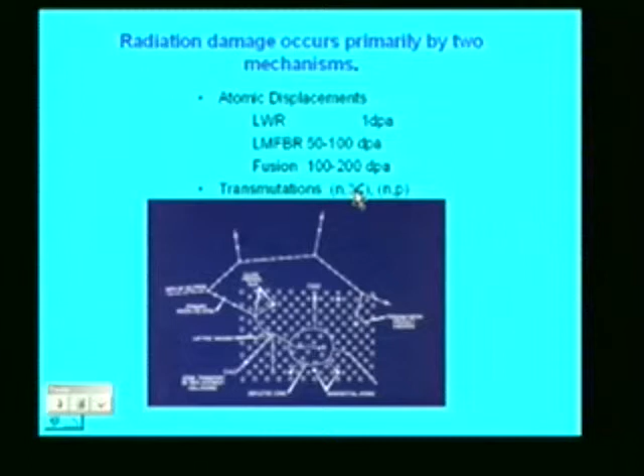In fusion, we may have 100 to 200. Well, we don't have any fusion neutrons or fusion reactors yet, so these are design goals. One time it was 400 dPa. I think people have backed off a little bit. The transmutations, this is supposed to be an alpha. We have n-alpha reactions that result in helium, and n-p reactions introducing hydrogen.

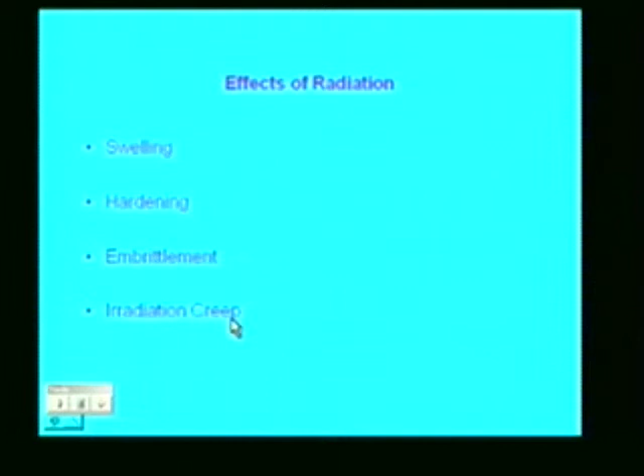So some of the effects of radiation, the most important ones, are swelling, hardening and embrittlement, which go together, and a rather interesting phenomenon, radiation creep. And I'm going to illustrate each of these. Swelling is a phenomenon where the vacancies we talk about precipitate and form voids. So they behave just like another chemical species, and a supersaturation of vacancies can lead to stable configurations of them, and they can grow as voids.

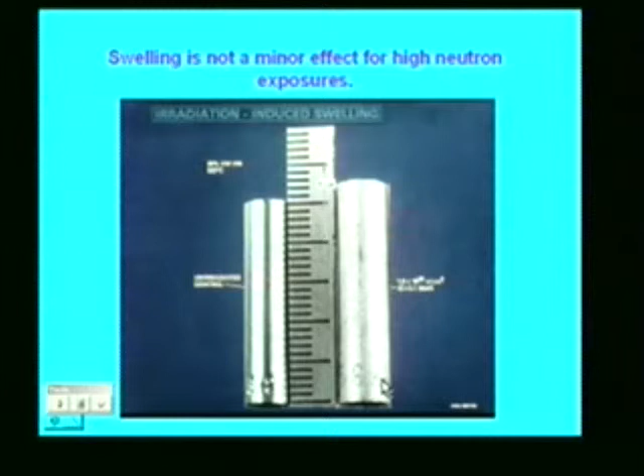Well, I've also heard people, especially in the fusion community, say that if you could hold swelling below 1% or to 1%, everything would be fine. But let me illustrate that, because I have two rods. One is 0.3% longer than the other, which would correspond to a 1% volume swelling. And if I match the ends of these rods, this is how much it bows. So if we have even 1% swelling, for example, in fuel rods, there could be serious problems. Fortunately, there's another mechanism, radiation creep, that will sometimes help us by relieving swelling stresses.

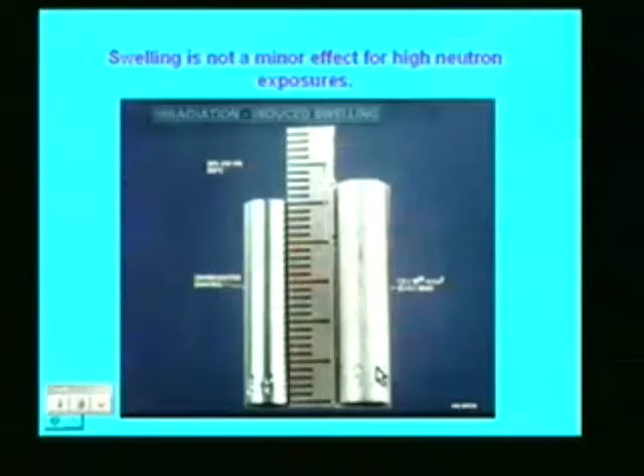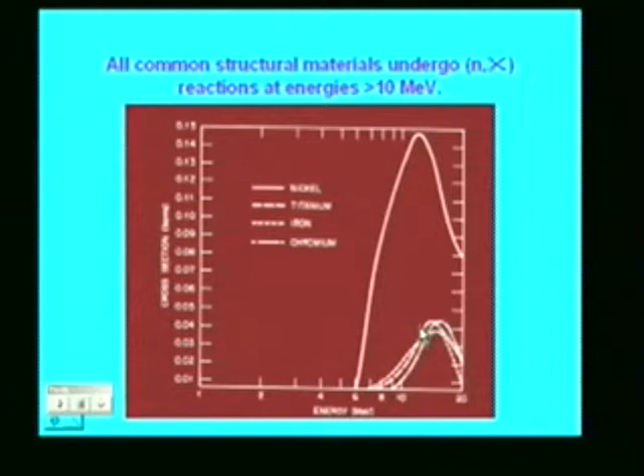Well, we talked about transmutations, and particularly n-alpha reactions in fusion reactors. And one way, you might say, to get around this problem is just to be very clever about choice of materials. But what I'm illustrating here is that if we look at the n-alpha cross-section for common structural materials, we find above about 10 MeV, they all have significant n-alpha cross-sections. Now you might say, well, let's stay away from nickel, that's a particularly bad one. But here, iron, chromium, titanium, and I could fill up that graph with a lot of other materials.

But worse than that, I think it's safe to say that all reactors have some sources of helium. One is the boron-10 reaction, and here, as you're probably familiar, boron-10 absorbs a thermal neutron and produces helium and lithium-7.

And this can be important in LWRs, for example. We have stainless steel core components. Stainless steels typically have boron concentrations of 10 to 30 ppm. And 1 weight percent boron will ultimately burn to 1 atomic percent helium. So we'll talk about that a little bit later, but small concentrations of boron can lead to trouble.

The next reaction is more interesting because it's a two-step reaction. Nickel 58 is a common isotope of nickel. It's about 68% abundance. It absorbs a thermal neutron to form nickel 59. The other product is a gamma. Nickel 59 also has a significant thermal neutron absorption cross-section, and it leads to iron 56, the common stable isotope of iron, and an alpha particle. So this can be a very significant source of helium in nickel in a thermal reactor.

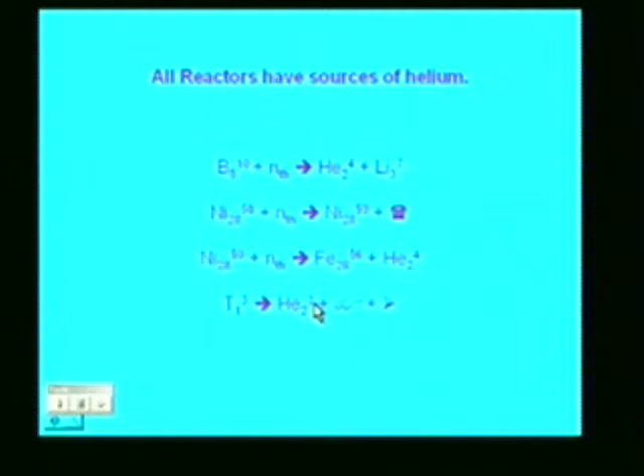Another source is just decay of tritium. Tritium decays by beta. It's a beta and an antineutrino. But the important point is the recoiling nucleus is helium-3. And this leads to severe problems, actually, in some of the tritium production reactors at Savannah River. And the reaction can also be exploited as a method of generating helium to study helium effects in materials.

And this material is Inconel 600. It's a high-temperature nickel alloy. Used to be a popular steam generator material, though there you don't have a neutron flux to worry about. It has been irradiated in the high-flux isotope reactor at Oak Ridge, producing about 1,800 ppm helium through the two-step nickel reaction at 650C. And this is probably one of the worst cases of helium embrittlement I've seen. You can continue irradiation and probably make it fall apart on the grain boundaries and produce metallic sand, if you like.

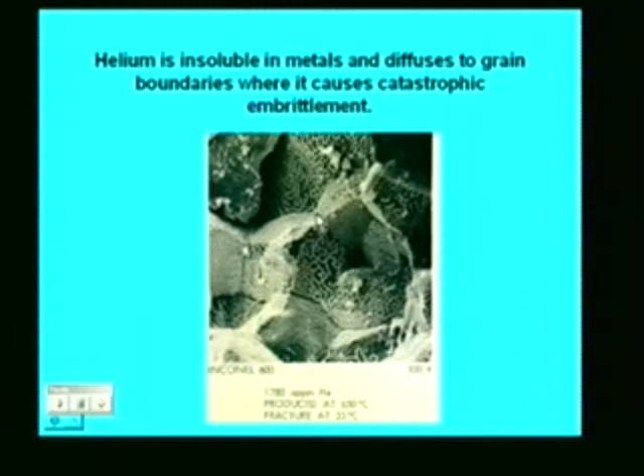What magnification is that? What application? Magnification, when you look at grain boundaries, what? Oh, the magnification? Yeah. I didn't read it, but 200 is pretty common, 200, 500.

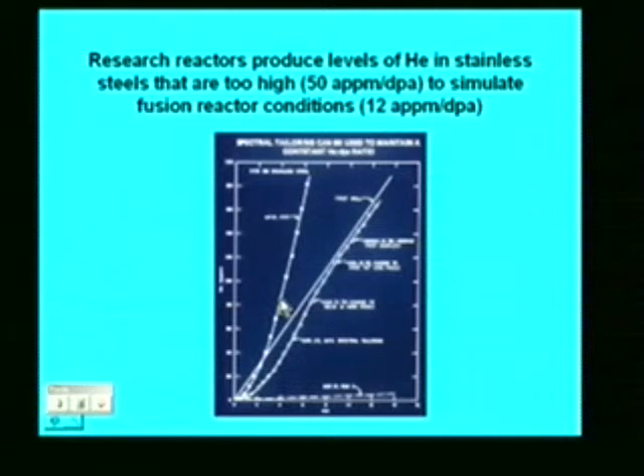There's another technique. If we have some alloys with low nickel contents, we can increase the nickel by nickel doping to produce the correct helium to dpa level. And here we're looking at an alloy. I hope you can read it better than I can. It's a common alloy of 12 chrome 1 moly with 0.2% nickel. If we irradiate that, we get far below the desired cross-hatched region, but if we can increase the nickel to 2%, we can produce the desired amount of helium.

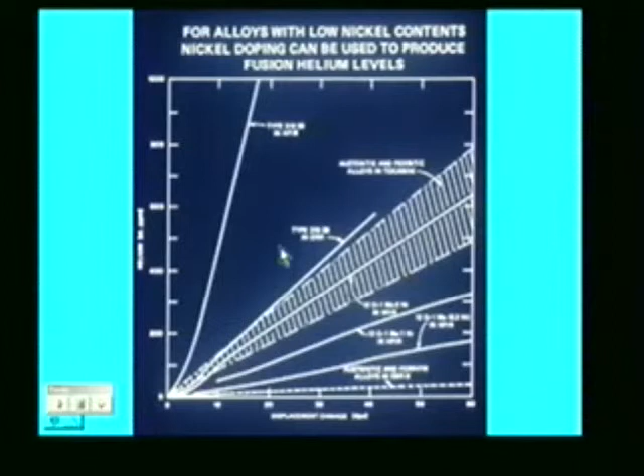Can also inject materials with helium from a cyclotron and then follow them with neutron irradiation. Now here's a case of vanadium alloy where we don't have any nickel. We can't use that neutron two-step reaction. So these have been cyclotron implanted. And if we look on this plot of elongation as a function of temperature, we see that the control has ductility increasing with temperature, which we'd expect, but if it has helium in it, we're down here with a very significant drop in ductility.

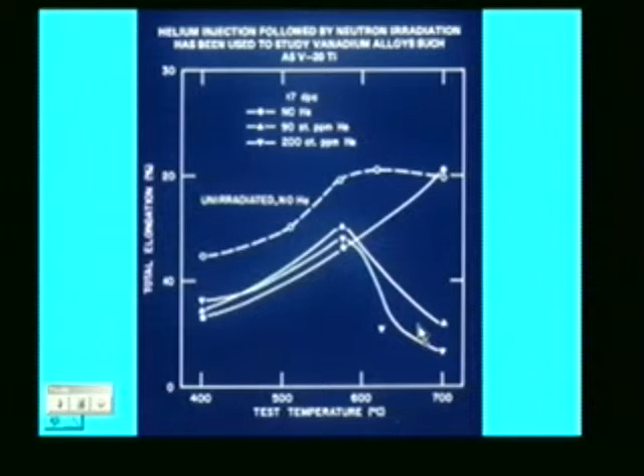So we're showing several techniques, and the reason is that when you're doing simulations and studying the fundamental behavior, one technique will not do it. You need every piece to the puzzle that you can get. So we use various techniques. For example, if you're going to dope with nickel, you have to understand the effect of adding the additional nickel. So one experiment cannot simulate behavior.

Another problem is that neutron radiation usually, in fact most always, produces intensely radioactive materials, which then necessitates remote handling. So when we generated these data, all of these tests are done behind 3 to 5 feet of high-density concrete and maybe 3 feet of lead glass, or a tank filled with, in this case, zinc bromide solution. Then all the materials are handled remotely with manipulators. In this case, we have an ultra-high vacuum chamber that's operated entirely remotely.

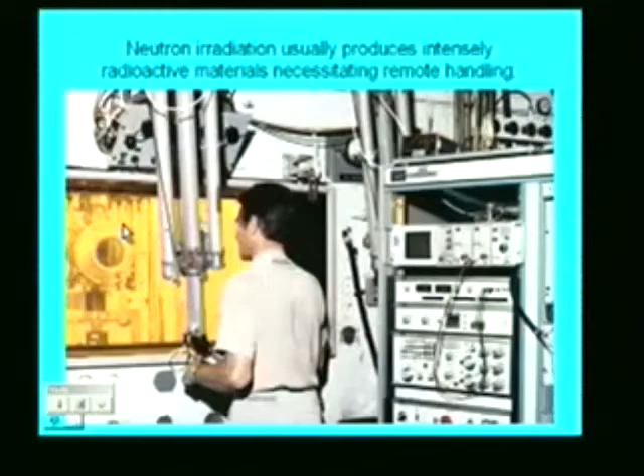Okay, I think that's the next slide.

Okay, I said we'd talk about radiation creep. Well, let me first talk about creep. If we take a wire and hang a weight on it, we'll get elastic deformation, and then it will stop deforming. If we increase the temperature, then it will start to deform again. That weight will fall. And this is a phenomenon of creep. But now, if we go back to our low temperature wire, room temperature, hang a weight on it, it sits there, now put it in a radiation field, it will deform. So for radiation creep, we need two things. We need a stress and we need a radiation field.

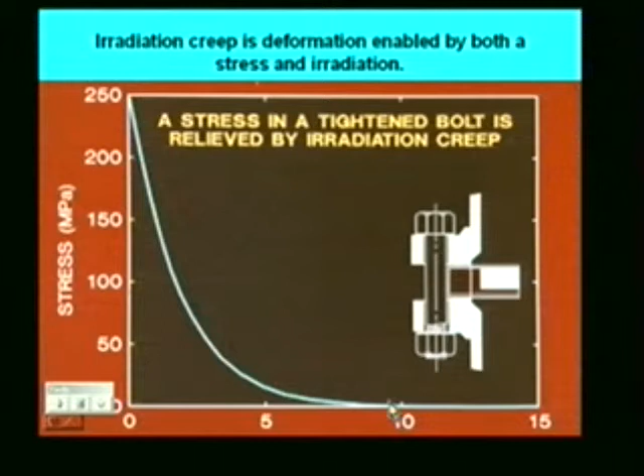To put it in perspective, if we tighten a bolt, in this case we're preloading it to a stress of 250 MPa, it's a pretty tight bolt, and irradiate it, by the time we get to 10 dpa, 10 displacements per atom, we've completely relieved the stress in that bolt. So one thing it's telling us, if you're going to fasten materials in a high flux region, don't bolt it. The other thing it's saying is this is a phenomenon that can sometimes be useful, because if we have stresses resulting from swelling, or in some cases thermal stress, radiation creep can be beneficial and relieve these stresses.

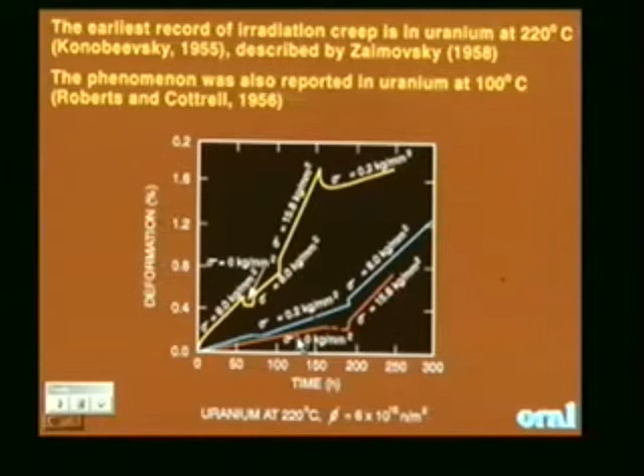But the earliest record of radiation creep is in uranium, and this was described at the first and second Atoms for Peace conferences in Geneva from some Russian work. And notice here we have a stress applied. When the stress is removed, the material stops deforming, or if we shut down the reactor, the material stops deforming. So we need, again, the two things. We need the radiation and we need the stress field.

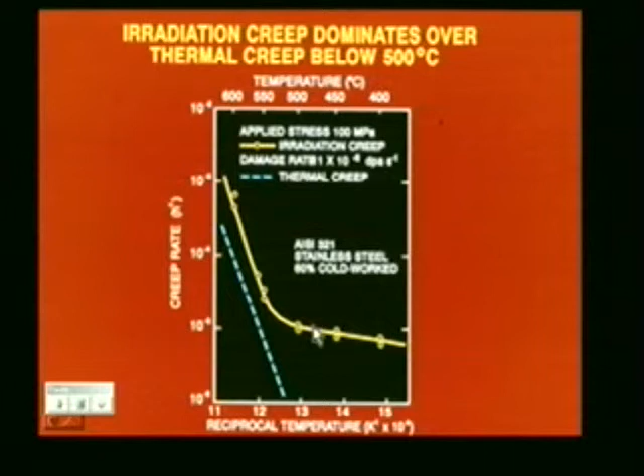Now, I said it was not a high temperature phenomenon, and here we have creep in stainless steel as a function of temperature, and in thermal creep we have deformation, but when we get down below, in this case, 500 degrees, it becomes insignificant. And we know that if we keep metals around at room temperature, they don't deform. The Eiffel Tower has been standing since 1889. It doesn't bend over and collapse. But if it's in an irradiation field, we see that even at the low temperatures, we have a significant creep rate that remains. And it has a very weak temperature dependence, maybe even none at all. That's quite an interesting phenomenon.

Well, how do we study it? Well, Galileo had all the right ideas. He was a clever fellow. And we said we could just hang a weight on a wire. Well, he used a beam and then hung a weight on the beam to measure deformation. Things haven't changed too much. The principles are the same.

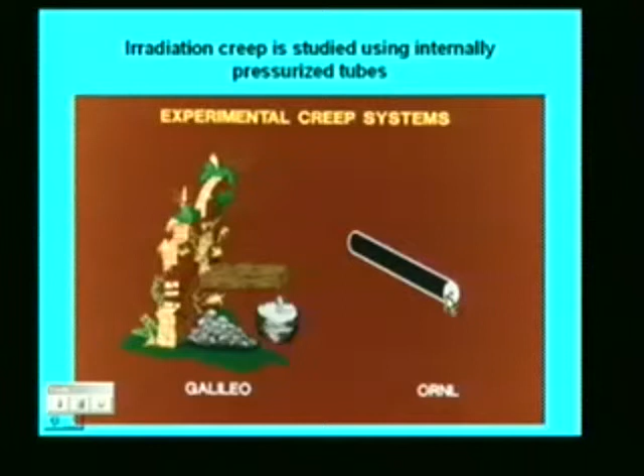We often use a pressurized tube. So we have a tube and we put it in a pressure bomb, pressurize it with helium to a desired level, and then shine a laser through a sapphire window and seal the tube. So this is a common way because they take very little space. We can put them in a reactor and we can study quite a variety of stresses. So it's a very convenient way to study radiation creep.

Well, now let's talk about some other defects. We talked about point defects in metals, talked about interstitials and vacancies. There's another kind of defect. We can take a plane of atoms, it's called a partial plane, and sandwich it into a crystal. And if we do that, notice it's a partial plane, it doesn't come all the way down. If we do that, we'll have a linear defect along the line where that plane ends. And this is called a dislocation.

And if we want to shear that metal, if we didn't have a dislocation there, if we want to put a stress on this plane with respect to the one above it, we'd find we had to break all these bonds. But if we had a dislocation, we can break one bond at a time, and the dislocation will kind of flip over and move to the edge. And metals commonly plastically deform.

Now, if we were to have a vacancy go into the edge of that row of atoms, then effectively that row of atoms would move up one lattice constant. Or if an interstitial diffused into that site, that row would move down. So we can have dislocations, we use the term climb, up and down, by diffusing interstitials and vacancies. So they can move. And if the dislocation is tied to a defect by an elastic stress, then these defects can cause it to move around these objects and enhance plastic deformation.

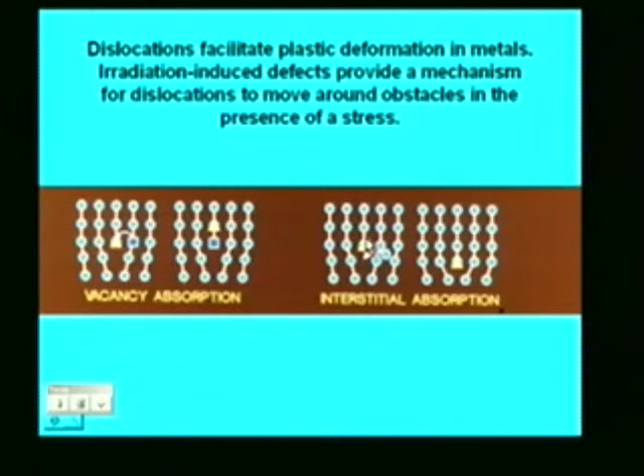All right. Well, we have lots of vacancies and interstitials around. Vacancies cause it to move up, and interstitials cause it to move down. So we have both. On the average, we don't go anywhere. But if we introduce a stress, then we can change things. Because if we had a tensile stress there to pull atoms apart in that region, it would be more energetically favorable to have an interstitial there. So now we can have interstitials predominate over vacancies, and now that dislocation can move. And this is one of the mechanisms of irradiation creep.

And the point is, if it can move around obstacles, get around obstacles, then we can have glide again. So the irradiation hardening that we said resulted from putting a lot of defects in and tying up these dislocations. We only said half of that earlier, but that's what happens. Now we can get them to move around.

So we kind of mislead people even when we call it creep, because it's not a high temperature phenomenon, it's an irradiation phenomenon. And what's happening here at these low temperatures, interstitials are free to diffuse throughout the lattice and can be attracted to the dislocations. But the vacancies are frozen out. Temperature is too low for them to diffuse. So instead of having them balance, we have a preponderance of the interstitials, and that's causing a higher creep rate at the lower temperature. And we can even get radiation creep at liquid nitrogen temperature.

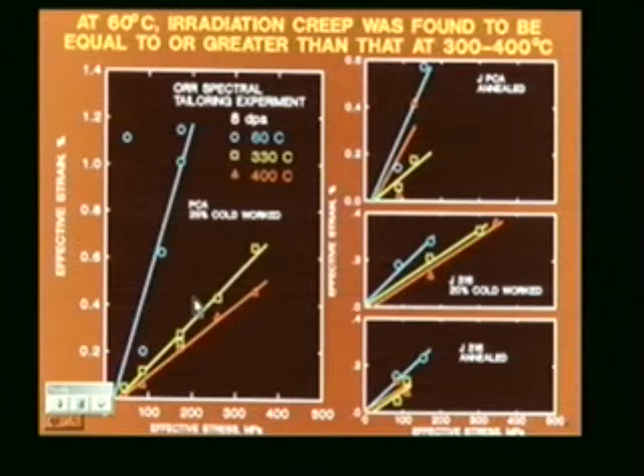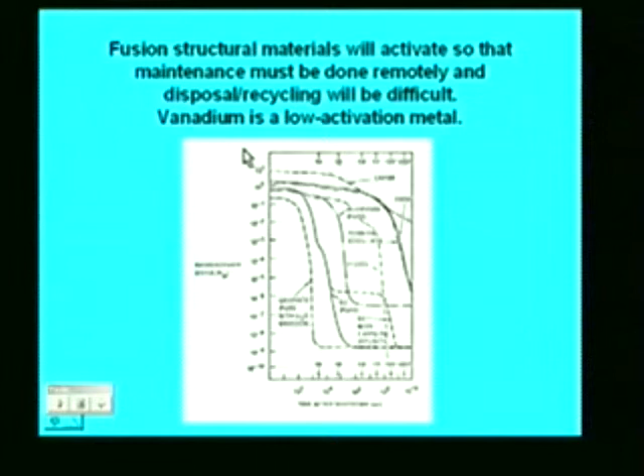So, if you have a structure like a fusion reactor made from vanadium, then at the end of its useful life, you have a chance of recycling it, or at least if you have to, burying it. Recycling is favored. The structural materials in a fusion reactor will activate to the point where maintenance on the machine has to be done remotely. And the disposal and recycling, of course, will be difficult. So vanadium is looked at as a low activation material. Especially true in Europe, where they're more sensitive to disposal of radioactive materials. So we're looking at vanadium as a fusion reactor material.

And the vanadium system would be cooled by lithium. Two reasons. One is that lithium can be used to generate tritium to fuel the reactor. The other is that lithium is compatible with vanadium as a coolant. Water or gas would not be, because you can't, for example, get helium pure enough to not embrittle the vanadium. In the case of lithium, the primary contaminant is oxygen, and the oxygen will primarily go into the lithium rather than the vanadium. So it's a nice material for vanadium.

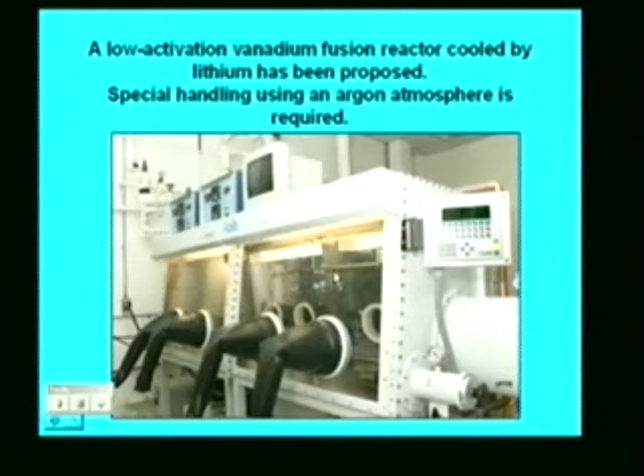But if you're going to use lithium, special handling is required, particularly a very high purity argon atmosphere. So the work with lithium is done in a high purity argon glove box. And in this glove box, we keep oxygen, moisture, and nitrogen below 1 ppm.

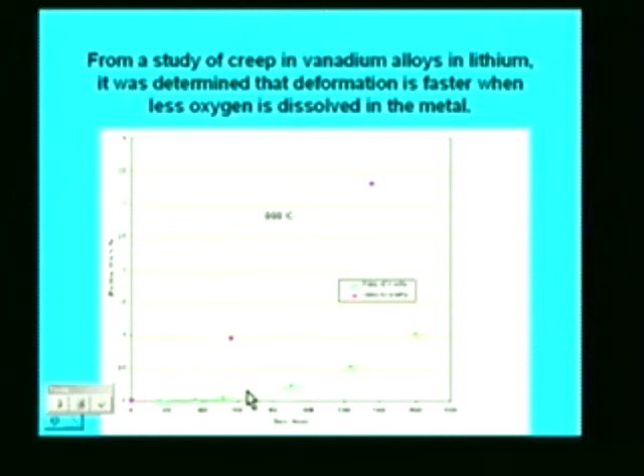Well, from the study, we said that in the case of lithium in contact with the vanadium, oxygen will preferentially accumulate in the lithium. So here we have creep strain, done with pressurized tubes again, in the case of vanadium in lithium, and the green curve is vanadium in a vacuum. And you can see that the creep rate is much higher in the case where we don't have impurity atoms impeding the dislocation motion. So it's a softer material when we remove the oxygen, and we get a higher creep rate. And needless to say, if you're going to use this as a structural material, you better know what the creep rate is.

Well, transmutation helium is also important in fission reactors. Repair welds are difficult or even impossible with helium concentrations as low as 1 to 10 atomic ppm. And here is an example. We have stainless steel with just 5 ppm helium. We've attempted to make a repair weld, and you can see it doesn't look great. And here we had it cracked.

They have a fracture surface that looks very crystalline. What do we call the fracture surface? What kind of fracture? Intergranular. Broke on the grain boundaries. Now if we go to a higher magnification, in this case we're really going up, this is 2000, we usually don't need it that high, we notice something very strange about the grain facets. They're all full of bubbles. When you look at it with higher mag, indeed, they are just coated with bubbles. And the bubbles link up, the material falls apart.

So if you wanted to make a repair weld, let's say at the upper shroud in a BWR, here's a case where it's at a very high flux, you probably couldn't do it. Again, just because of the boron, you have 10 ppm boron, leads to 10 atomic ppm helium, and with normal techniques you can't weld it. So this is one thing that's being investigated, how we might apply a compressive stress, for example. Works fine in a laboratory. I don't know how it would work in a reactor vessel. Meaning I don't know how to do it in a reactor vessel.

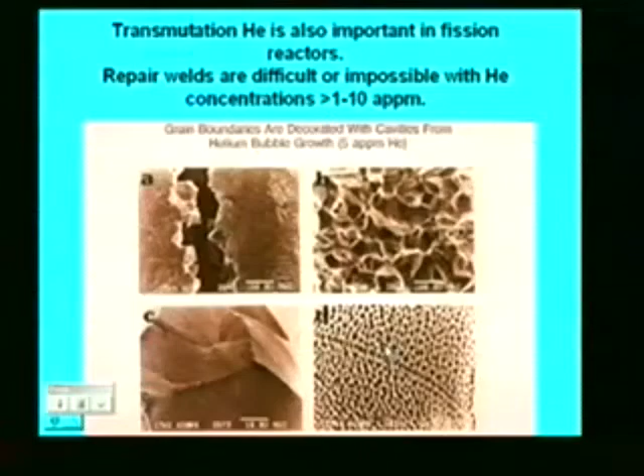Okay. Let me touch a little bit on another problem with transmutation. Let me first talk about burnable poisons. Burnable poisons are used in all modern reactors to homogenize the power distribution and reduce the extent of the control system required. And what I'm showing here is, if we look down the core region of an LWR, of a PWR here,

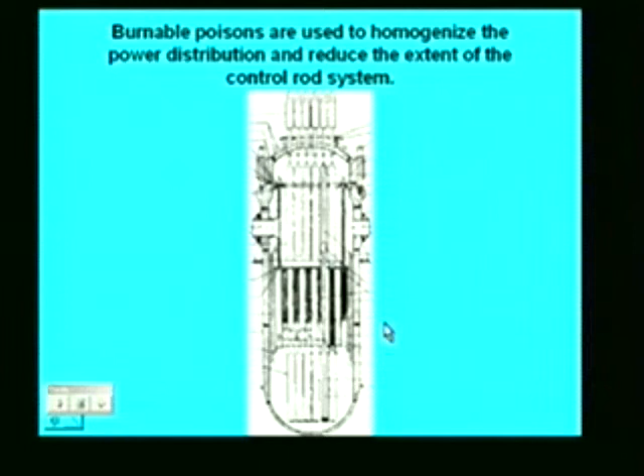if we load a critical mass of uranium, we can start a reactor. And as soon as we fission the first uranium atom, we no longer have a critical mass, so our reactor shuts down. So obviously you have to load enough uranium for the length of your fuel cycle. Well, now if you do this, you have to get back to criticality, so you have to put control rods in there. If you really have a high fuel loading and then you put in all your control rods, having to just pull them a small distance to get critical, you end up with almost all your power produced in the bottom of the core. Of course, designers can get clever about this, and they have banks of control rods, so you don't just have one bank, and that helps.

But if you had a burnable poison, homogeneously distributed, and ideally one that burned at the same rate as the fuel, you wouldn't need a large control system, and then you pull the rods out and generate power throughout the core, and even out the power. So burnable poisons have a large benefit, and as a result, they're used.

Boron is frequently used as a burnable poison, often inside the fuel pins. We've seen this reaction before, the boron-10 reaction, and remember it's producing helium. Well, helium gas generates an internal pressure in the fuel pins, and when the internal pressure exceeds the coolant pressure, you're going to have the cladding separate from the fuel, and then the centerline temperatures of the fuel are going to soar. So we don't allow that to happen. So using boron as a burnable poison can be limiting your fuel burnup.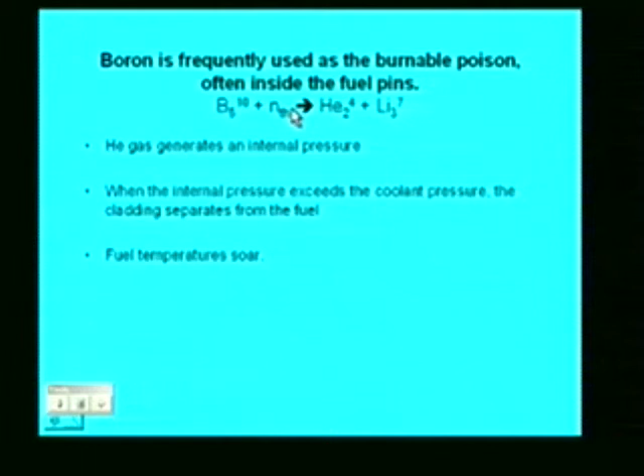Well, other burnable poisons can be used, and they are used, but they do not burn completely. So you end up with residual reactivity at the end of your fuel cycle, and that's going to shorten the life of your fuel. It's like having a control rod stuck in there. You could run the fuel longer if you didn't have that burnable poison in there.

The residual reactivity usually results from lower sigma A isotopes, lower absorption cross-section isotopes that burn more slowly than the primary absorber. Now, if the cross-section were small enough, they wouldn't cause any problem. It's the intermediate ones that cause problems.

For example, here are the stable gadolinium isotopes, and gadolinium-157 probably has the largest absorption cross-section of any isotope. It's absolutely enormous. Gadolinium-155 is also huge, but 154 is around 60, and that one is a problem because it is an absorber, it is significant, and it doesn't burn up very fast. So by the end of the fuel cycle, it's still there. Gadolinium-156, I believe, has an epithermal cross-section that makes it a problem.

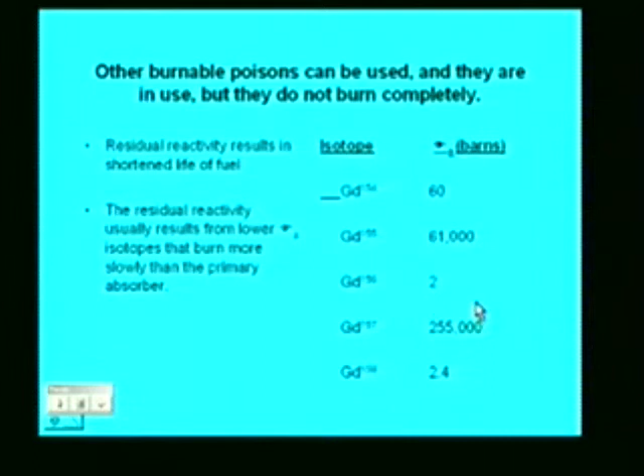Well, we could remedy that by isotope separation. An example here is again gadolinium. Over here we plotted the macroscopic absorption cross-section as a function of time. If we look at the total, we notice after about 3 or 4 years, we end up with the residuals in a steady state around 0.15 or so. In this case, we have removed the gadolinium-154 and 156, and you can see that the residual is lower by roughly a factor of 5.

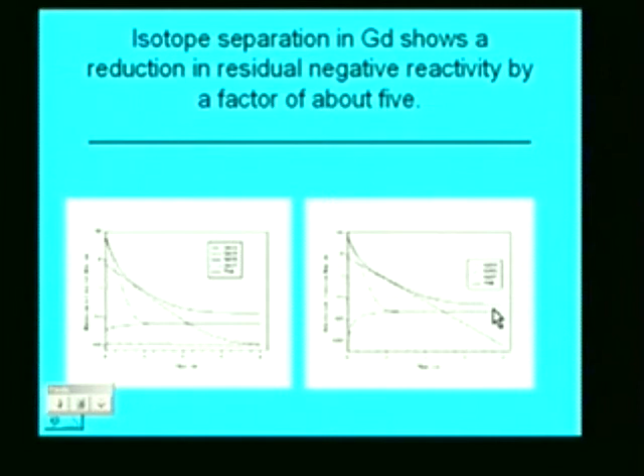Now this is kind of a simple calculation, not very sophisticated. At this point we had to do a sophisticated calculation. So what happens when a metallurgist needs a sophisticated neutronics calculation is you go to somebody who's an expert in the field and you let him do it. You team up. This is the way we do research. It would take too long for everybody to try to learn each field he has to get into, but by cooperating, we can put a lot of power to bear on a problem. So the calculations here were done by John-Paul Renier at Oak Ridge.

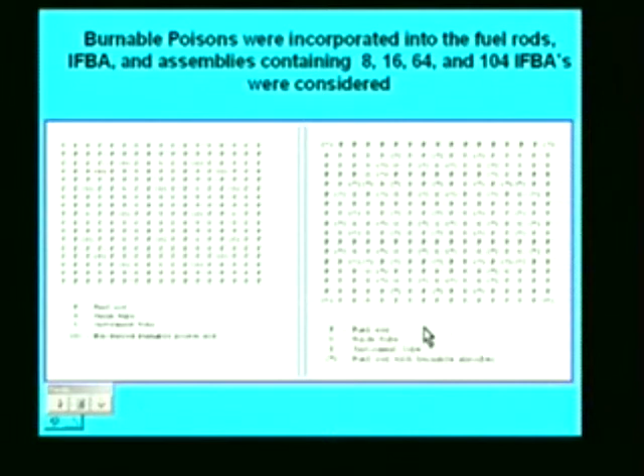What we've done here is incorporated burnable poisons into the fuel rods. This is not unusual. They're called IFBA, Integral Fuel Burnable Absorber rods. We've looked at assemblies containing 8, 16, 64, and even 104 rods. This is a case where we have a PWR fuel assembly with 64 burnable poison rods.

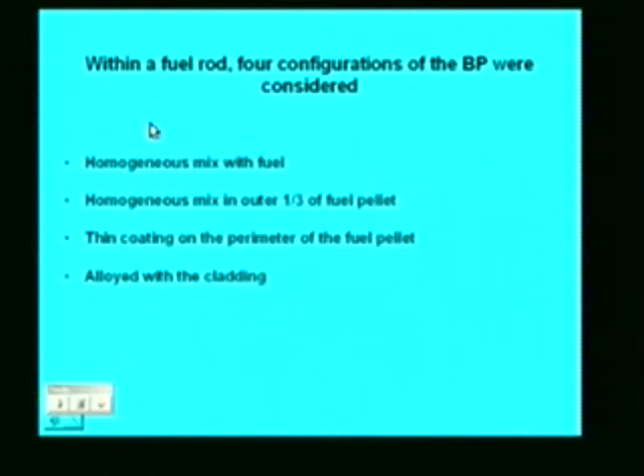Within a fuel rod, 4 configurations of the burnable poison were considered. One is simply to blend the burnable poison with the fuel. The other is to put the burnable poison only in the outer third of the fuel pellet. This can be done; you can make compound fuel pellets. Another is to have a thin coating on the perimeter of the fuel pellet. It's done in Westinghouse fuel; the burnable poison is a coating on the fuel. Another idea, which I think is fairly new, is to alloy the burnable poison element with the cladding. So in this case, we'll use the burnable poison in a metallic form and alloy it.

Well, Monte Carlo calculations were then made using state-of-the-art computer codes and a sequence of codes. The main one is the Monte Carlo code MCNP4C, and then ORIGEN 2.5 to track the isotopes. Let me save a little bit of time. Whoops, I'm having trouble. Okay. We'll skip the details on that and go to some of the results.

What I'm plotting here is the reactivity due to burnable poison as a function of a penalty. The number of days that a reactor could be run if the residual burnable poison were not present, we'll call the residual absorber penalty, the RAP. This can be used as a parameter to determine the benefit of our isotope separation. If you work out your model with the burnable poison and determine how many days it will last before K effective drops below 1, then you take the burnable poison out and run the same thing and see how many days it takes to drop subcritical. The difference is the penalty that you paid by having that burnable poison in there.

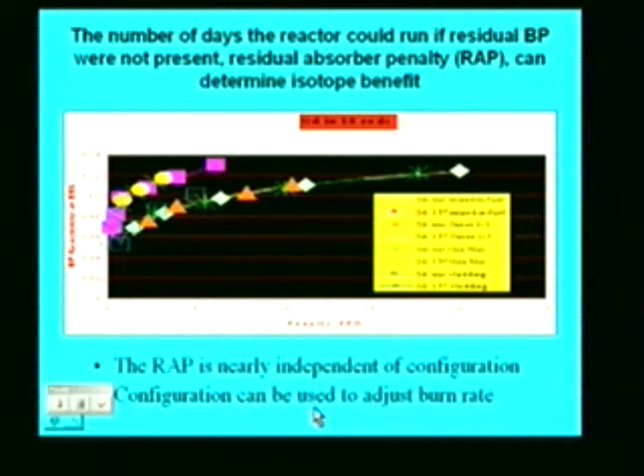Okay, something very interesting is that if we plot that for each of the 4 configurations, they all lie on the same curve. So the RAP is essentially independent of the configuration. Well, that was a surprise, at least to me. I still don't understand it. But this is convenient because now the configuration is an independent parameter that we can use to adjust the burn rate.

If we change the number of rods that we put the burnable poison into, now the curves are different. They don't lie in the same. And if you track some of the numbers here, and this set of curves for 16 rods versus 64, you find it doesn't hold. The curves are very different.

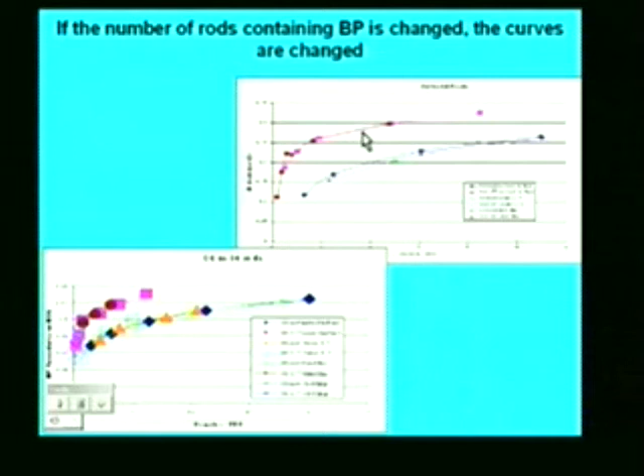To compare the separated isotopes with the natural element, we'll look at the following ratio. We'll look at the reactivity at end of life over reactivity, negative reactivity from the burnable poison at the beginning of life for the isotope, and compare that with the same ratio for the natural element. So if separating isotopes in the burnable poison doesn't do us any good at all, that ratio is going to be 1. The smaller it is, the better.

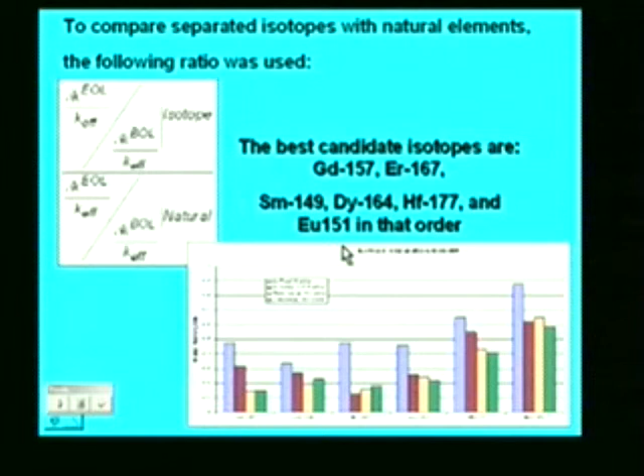The self-shielding effect becomes apparent if we look at a simpler ratio. If we look at just the negative reactivity due to the burnable poison at end of life over beginning of life, in other words, how well does it burn up, we notice gadolinium does quite well. But let's pick any one of them, and we notice kind of what we expect.

If it's homogeneous, it doesn't completely burn up, but if we spread it into a thinner coating and we have less self-shielding, it does. And if we put the burnable poison out in a clad, we go out into a region where the thermal flux is higher, so we don't have the thermal flux depression of the fuel, it will burn up even more. So just the configuration will give us another parameter to adjust the burnable poison.

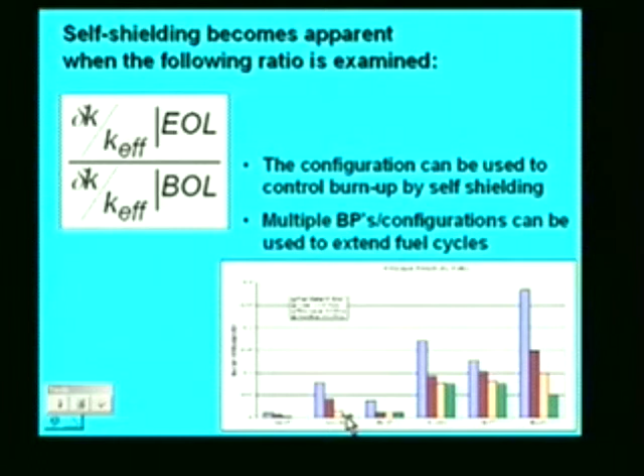Okay. Well, let me just save a little time here. Suppose we have a burnable poison that burns up completely. This is great. But if it all burns up in the first month, then it doesn't do us any good. We might as well not have it. So we better take a look at that also. If we look at the time dependence, here we have the case.

We have the case of putting the burnable poison in the outer third of the fuel pellet. And if we look at these first two graphs, the first one is for the natural elements, second one is for separated isotopes. The first thing we notice is that for the case of the separated isotopes, we in general burn them more completely. Well, we already knew that.

If we look at the case of gadolinium on either natural or isotope, it looks like we're burning it far too fast because after just 1 year, essentially all our burnable poison's gone. Same thing with samarium-149. But if we go to erbium-167, we find a much more uniform burnup. And the same is true for the erbium isotope as well.

The others. So if we are going to have a very long fuel cycle, maybe we want to have a Generation 4 reactor where we don't take the head off the vessel for 4 years. We would probably have a blend of burnable poisons. We'd use one of the longer ones for the longer term behavior.

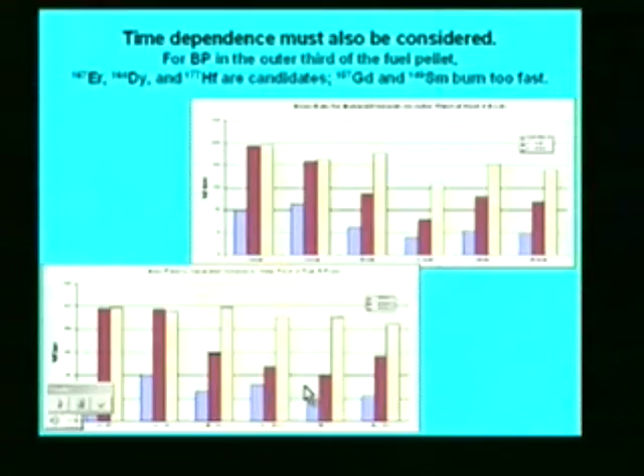For some of the absorbers, the isotopic separation could lead to quite a large savings. For example, here we have erbium in 16 rods. And just take a look at some of these numbers. To reach a given reactivity, let's take 0.06, we have 25 days penalty in the case of natural elements; in the case of separated isotopes, we're down around 5 days. We saved around 20 days. Okay?

Well, in 4 years, the isotope separation benefit ranges from 6 to as high as 110 days. Now, if we look at the case of gadolinium in 16 rods, that's the one where we save 6 days. In the case of samarium-149, you might say, well, sure, but if samarium is going to give you a penalty of 50 days, maybe you're not even going to use it. So we have to be careful how we use it and what we use it for.

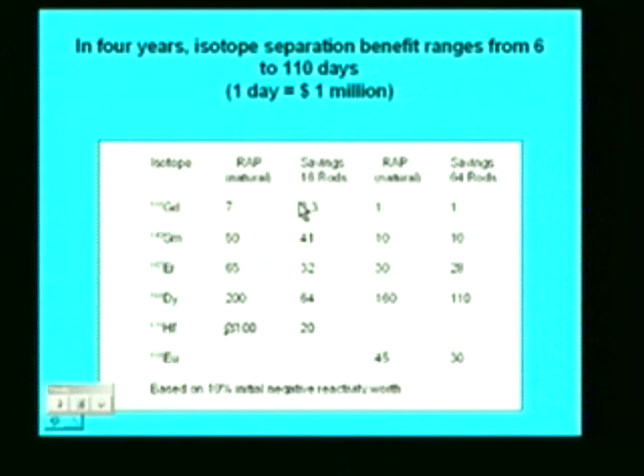But if we just consider gadolinium, 1 day savings at the end of the fuel cycle is worth $1 million. So if you can run it just one more day, you've saved $1 million. Now, I recently presented this to the Korea Atomic Energy Research Institute, and their feeling in Korea is that the designers, the utilities, can be clever enough with their fuel management that they think they can save that 6 days. So they're not excited about separation of isotopes for commercial reactors, but they feel it's essential for the Generation 4 reactors.

Well, we talked about separating isotopes, but everybody knows that's almost a brute force technique and it's very costly. But there is a technique called plasma separation that has been used over the last 20 years, been experimented with. And here you sputter off some target material, you get a plasma, you put it in a chamber with a strong magnetic field, and you drive it with microwave energy, and the radius of revolution around the magnetic field lines is a function of the mass.

The higher the mass, the larger the radius. So you can have targets at a given radius to trap a particular isotope. And here are some calculations for this process. For example, gadolinium-157 has about a 16% natural abundance, but just one pass can take it up to 46. But what's really important is that they're talking tens of kilograms per year. Calutrons normally talk about milligrams, and here we're talking about kilograms.

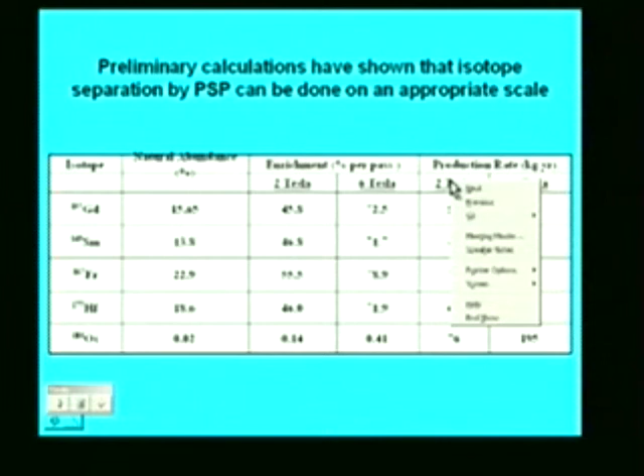Okay, let's skip that. So to summarize, radiation effects include swelling, embrittlement, and irradiation creep. Understanding is good enough that we can reduce their effects. What's important is that we understand them, predict them, and learn how to live with them. The neutron spectrum is important in determining the effects of all of these, especially those associated with transmutations. In fusion reactors we have transmutation helium, which hurts us a good deal, and we've learned how to simulate this using the opposite end of the spectrum, the thermal spectrum in a research reactor.

Irradiation creep can be detrimental as well as beneficial. Again, we have to understand it and predict it. Fission research reactors can be used for accelerated irradiation effects investigation for both fission and fusion reactors. Transmutation-generated helium can lead to very serious failures in repair welds in LWRs, and this is a real problem that's receiving a lot of attention these days. Isotope separation in burnable poisons can reduce cost and extend the fuel cycle for advanced reactors.

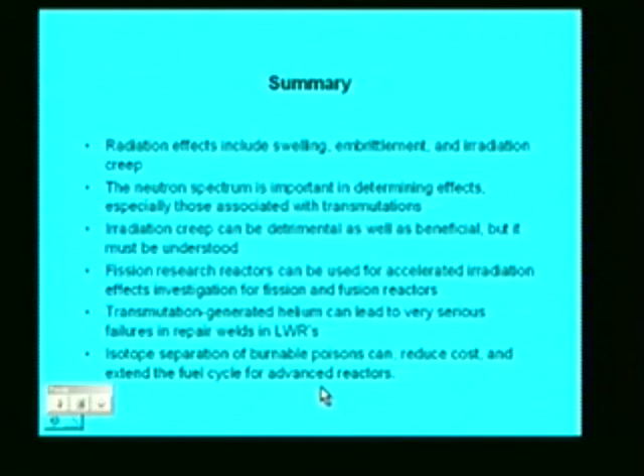Let me leave you with a thought. There's a quote from Dr. Norman Hilberry, former director of Argonne National Laboratory, who said, "We physicists can dream up and work out all the details of power reactors based on dozens of combinations of the essentials, but it is only a paper reactor until the metallurgist tells us whether it can be built and from what." Norman Hilberry is also the original SCRAM.

When Fermi built the first reactor under Stagg Field, in the squash courts, he had a set of safety control rods that were removed and then tied with a rope. And Norman Hilberry held the axe, so if Fermi gave the signal, he could cut the rope and shut down the reactor. I had the pleasure of talking with Dr. Hilberry several years ago, and I'm really kicking myself for not asking him whatever became of the axe. I suspect it ended up in a salvage pile somewhere, but I don't know. Okay, well, thank you.

Okay, we have time for one or two questions. Any questions? Any comments? Joe? I have sort of an off the wall question. You were talking about the axe. There was an acronym for what the guy who cut the rope was called, and I can't remember it now. Do you remember what they called him? Oh, that was it, the SCRAM, Safety Control Rod Axeman.